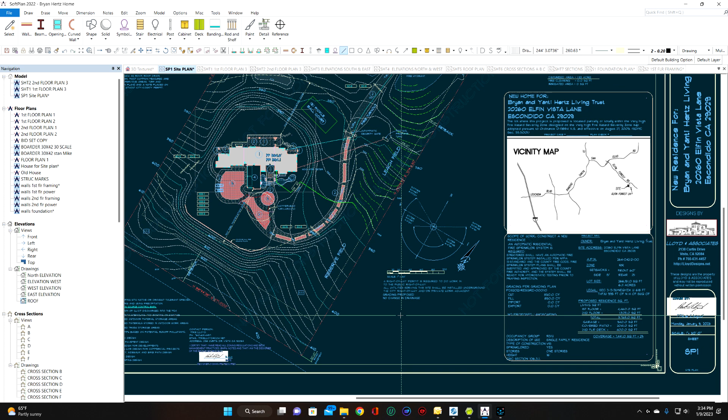My back's killing me, so forgive me if I'm short and crabby. Old, short, and crabby. I've got to stand to do these, so I can't sit at the moment. I'm just complaining, I know.

Forgive me, I sent you over the wrong site plan. That was an earlier version. I had some of these things already on this site plan, and I hadn't corrected where the number threes and twos and fours were supposed to go on all of it.

So I think I had threes listed up here. The three is the pickleball court, and here you can see this is even messed up. Three... oh, it's because I'm on the house site plan. It's going to take it a minute. Oh, good grief, this thing. Just do what I tell you, dang it.

And it's an existing pickleball court. I'll get to that question here in a minute. Let's see your first one, power plans.

That back area, okay, that's no big deal. The way I drew it, I figured that'd be a dining area. In a dining area, typically you need more lighting for any kind of workspace or that kind of thing, and you have the option of a fan light there also. So I'll just make those all the same.

Should we show the pickleball court as existing? Yes, I did show it as existing. I showed it with a 30 by 60 square feet, and that's up in here. I think that's on your set, 30 by 60. The number one is the house and the patio covers.

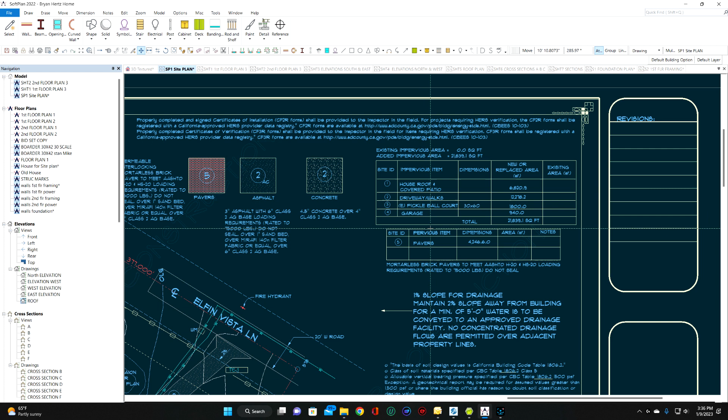2 is the driveways and walks, and 2 breaks down between asphalt and concrete. 5 is the pavers. So we've got house, driveways and walks, pickleball court, garage, and here's your pavers. So we've got that on there.

Included plans. Pickleball court's 30 by 60, I think that's what you told me. That's what that is. This thing is ticking me off, man, I'm crabby. That shows 28 by 60, we'll make it 30 here. Okay.

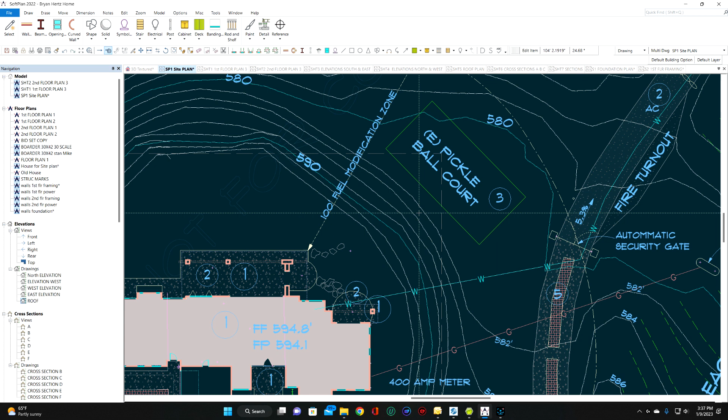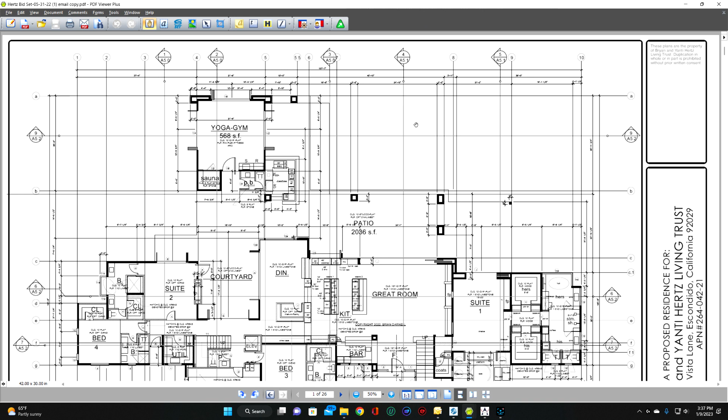Should we relocate the gas tank? I'm going by your permitted grading plan. Let's see if I can find that real quick. I think this is it. No, this is your bid set, and I didn't have a copy of a site plan in the bid set. I didn't have anything to go by other than what you sent me, and you sent me the grading plans, which I went by.

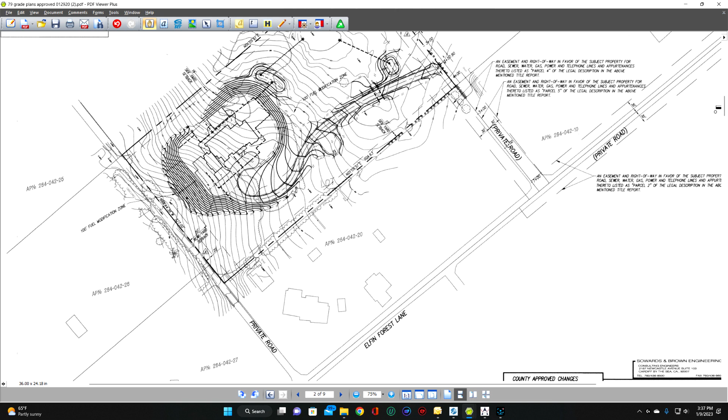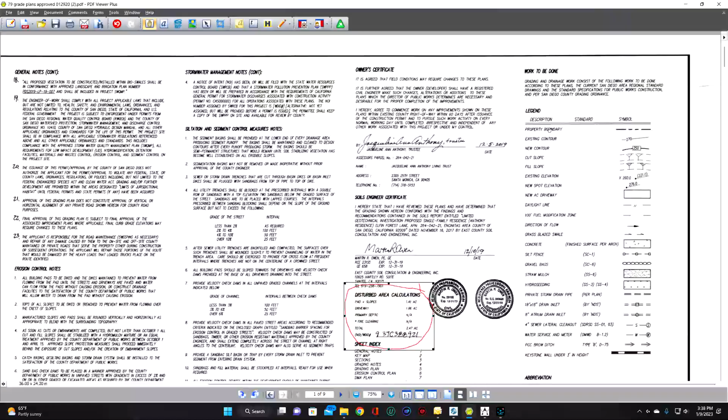The grading plans show that over here, and I'm just trying to stay as close as I can to the grading plans, because the more we change it, the more the chance that they're going to make us redo these grading plans. I've noticed these were done by Sowards and Brown, a great engineering company, been around forever, done at the end of 2019. They've changed some stuff since then, the county has, and we may be redoing this anyway. Hate to say it, but just to prepare you for it, just in case.

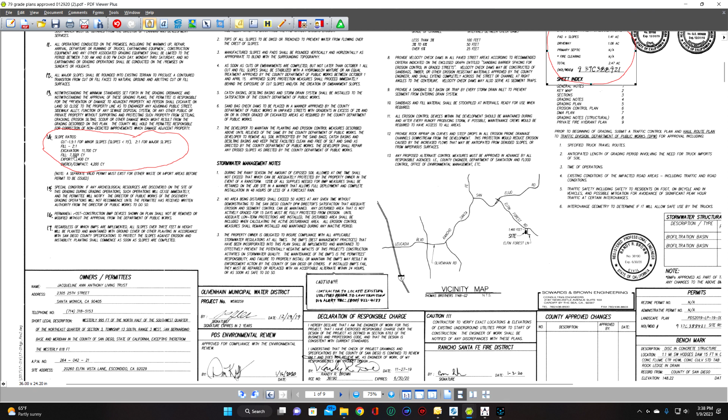Here's his excavation notes, that I have to put those on my site plan. I will, I haven't done that yet. Like I said, this is just a bid set, so it's not ready to submit.

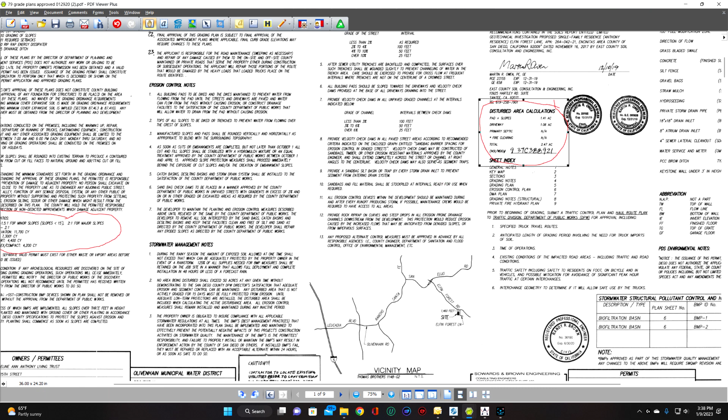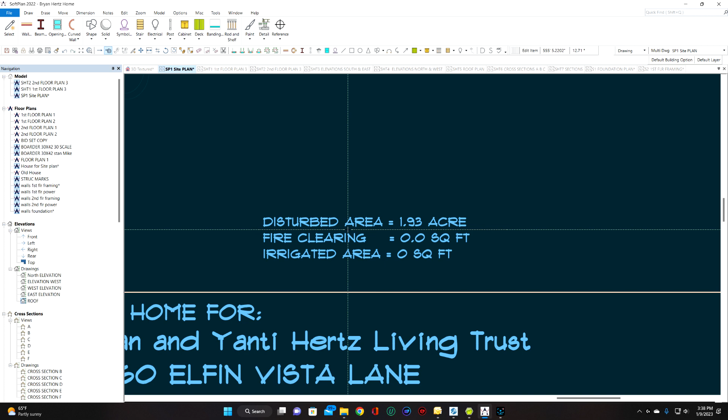Your disturbed areas, I come up with a lot less than they did. They've got 2.47 square feet -- I mean, where am I here -- I'm not feet, acres. I've got 1.93 acres.

So neither one of us is including the leach field, and it might not be a bad idea to just go ahead, if you've got a permit for this, go ahead and put this in and do it separately. Well, you can't really at 1.93. I was going to say, if you can get this under an acre of disturbed land, you're not going to have to do a major grading plan, but you're not going to be able to with all this going on. It's just no way, too much going on.

But if we include this, that's going to make it even more disturbed area, so I'm not including that. It might be a good idea to finish this out if we could. I'm not sure what DEH would say about that -- I think they need house plans. You could talk to them about that.

Because this isn't going to affect anything you do over here. You get an approved septic system, and it really improves the value of the property also.

Let's see, back to your stuff here. Should we relocate it? Oh gosh, what did I just do? We can relocate it if you want, or stick it over here, where I think you said it was. It's just one more change from the existing grading plans. Let me know what you want to do on that.

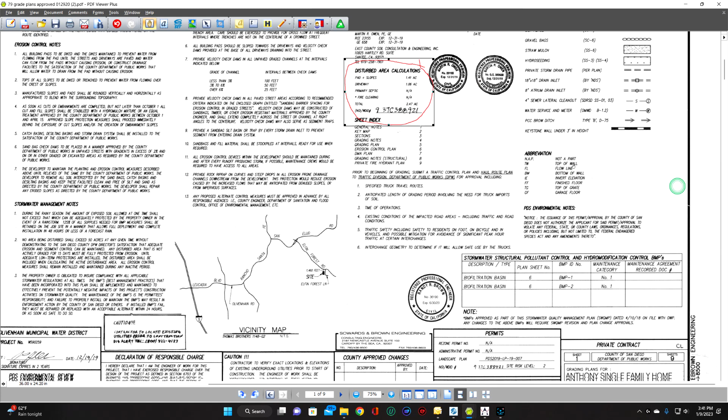We have 29,018 square feet of non-permeable approved in the grading plan. We do, I saw that in the... Now, if you've got something more current than this 2019 set of grading plans, I need to see those. But going by it, it mentions that number also.

I've got in this, 21,000, so there's 8,000 feet different here. Well, 7,000 somewhat different - 21,839.1, and if you're going to add a tennis court, which is 7,200, just a hair over what the grading plans are calling for.

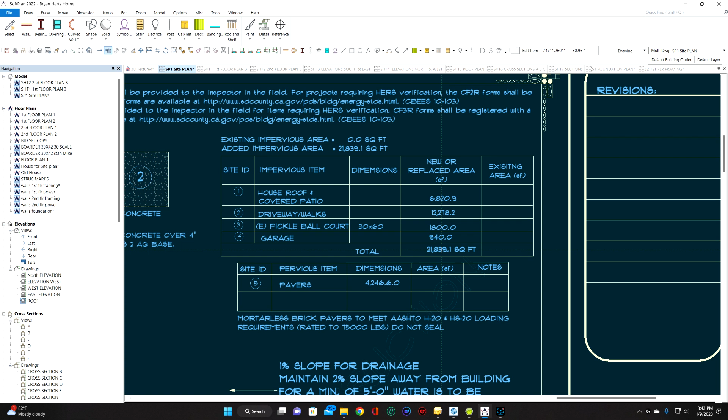Like 10, what is it, 10, 12, 13 feet or something like that. So I can fudge this to make that work if you want, reduce that number to where we don't go over the 29,000, whatever the number was. So we're close on that.

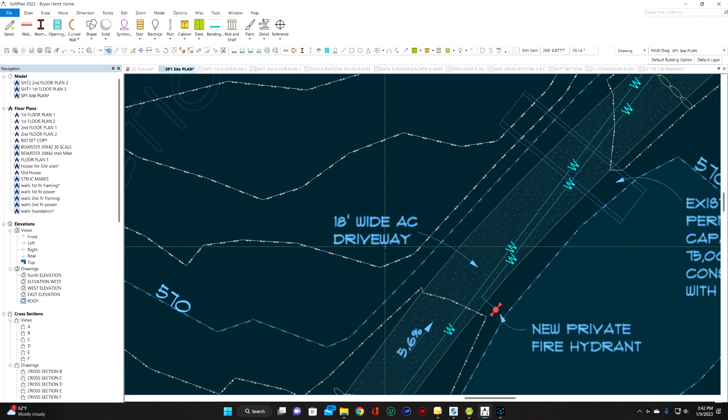The width of the driveway is 18 feet, that's what it is on that approved grading plan that I have. The easement down here is 20 feet, shows that 20-foot road. And I don't have to get real detailed on it.

This is mainly the building plans. I know the fire department does look at that, so they'll want to see that. But I don't have to show everything that the grading plans show - the drainage and all that. So that might be a good thing. But I think they're going to make us change it.

Usually a grading plan, when it's finished, is a legal document. And so they want these things as close as possible. We'll see what they say. But again, just preparing you.

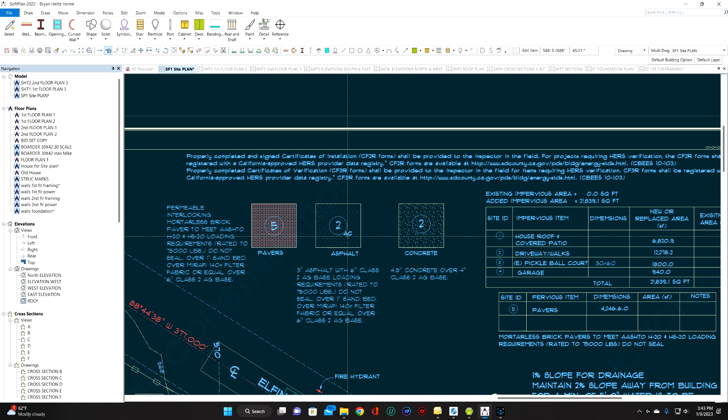Grading plan requires a machine. Yes, I've got this, this is this 2AC, is what this is up here. 2AC is asphalt - shows asphalt, 6-inch class 2 AG base, 6-inch.

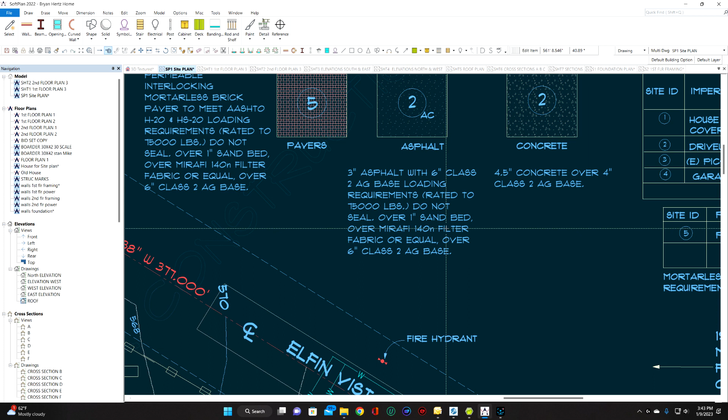Yeah, it could be 4 inches. Typically, if you want that 72,000 or 75,000 lb rating, unless you got really good dirt up there, which you might, you go with a 6-inch base. You could go with a 4 if it's good dirt underneath it. Then the engineers will make you do whatever's required for that.

So yeah, I'm taking this AC all the way up to this gate, and then I'm changing it from there to concrete. Going up this slope, concrete - I'm showing all concrete. You mentioned DG, my plans, none of the plans that I had mentioned DG, so that's what I went with, but I can change that. With the driveway, grading plan, machine curb, I believe.

Which needs to be, yeah, we showed that. Grading plan requires machine curb. Asphalt, most economical, I agree. Asphalt's the best way to put that curb in there. I don't have to show the curb.

That keystone wall is where you were making this transition to a hard surface. If this is the fire turnaround, it's got to be something like AC or concrete. I mean, they might let you do DG, depending on the fire department. But the Carlsbad Fire Department, that fire department up in that area is pretty picky, from what I've heard.

So I think you're going to have to go some type of concrete paver in this area. You can go DG over here, that's not an issue. I don't like DG on a nice house because it's a maintenance thing. It rains and stuff, and even though it's compacted and all that, after a while it erodes and turns into a mess. But it's your house.

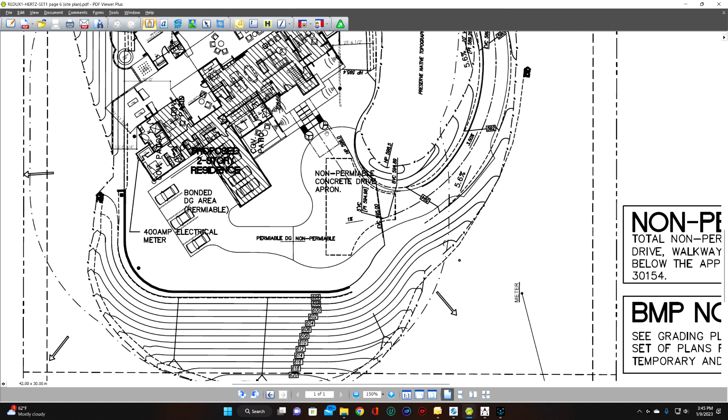Like I said, I'm crabby with the modern exterior. I don't know if I like the pavers. Now, the pavers, what he's doing here, maybe I'll answer a couple questions with this. Even your previous architect, let's see if I've got that handy. Here we go, your previous architect, he's got these radiuses in here, and then he's got these radiuses with the pool. It's not shown in this one. This is the thing you just sent over to me, and it's the first time I've seen this one.

I think I might have had a reduced one of these, I didn't have all those side notes that I'm aware of. He's breaking up all the hard lines with these curves and introducing other materials. The pool back here, you've got all these real nice curves in here, and he's creating contrast with that.

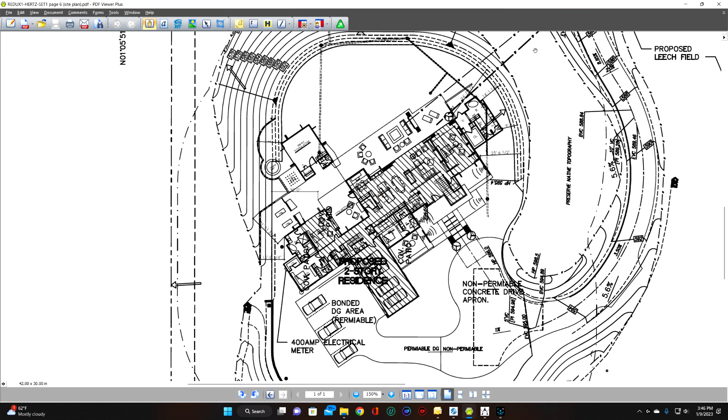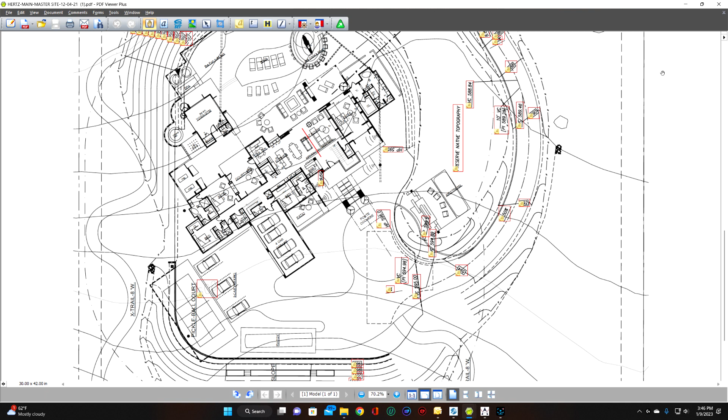Here's one, this is better. You see the curves, the circles that he's putting here. He's got all these squares, all these hard edges, but then he mixes in these nice radiuses, the pool, this whole thing right here, that's all these radiuses and curves. He goes back to a little bit of hard edges in here, but then he's got the round again. And it's the same principle that he's doing here.

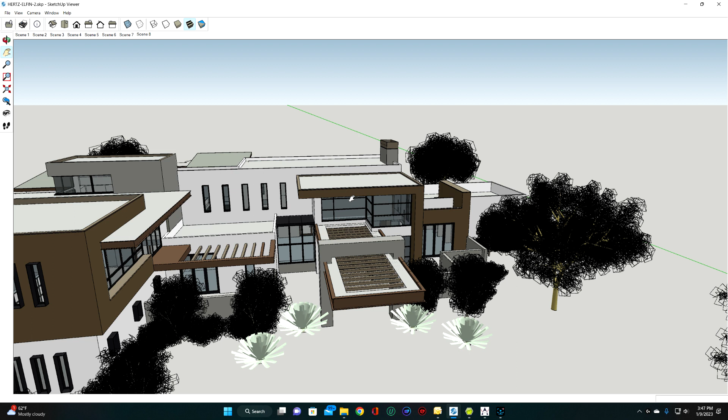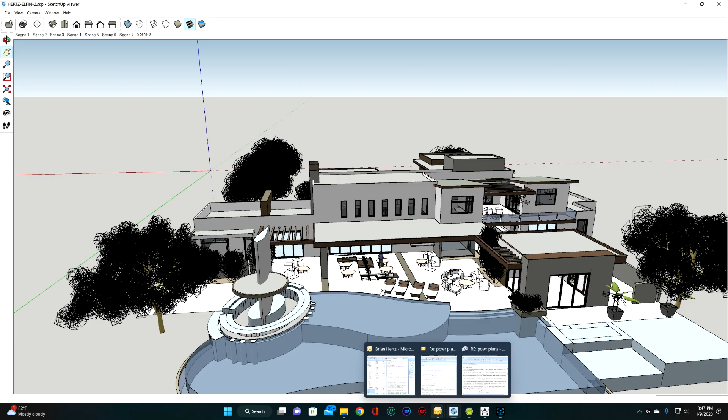Let's pull this up again, I think I got it handy here. Yeah, it's the same principle as the vertical and the horizontal elements. It's the exact same thing, it's creating contrast. This thing finally catches up here. Computer's struggling. Okay, well anyway, that's what all this stuff is about in here, these curves and all that, and then the driveway is the curves. You got all this hard edge stuff, very industrial looking, and he's softening it by doing this stuff, and he's creating a contrast that really, I think, really makes it look great.

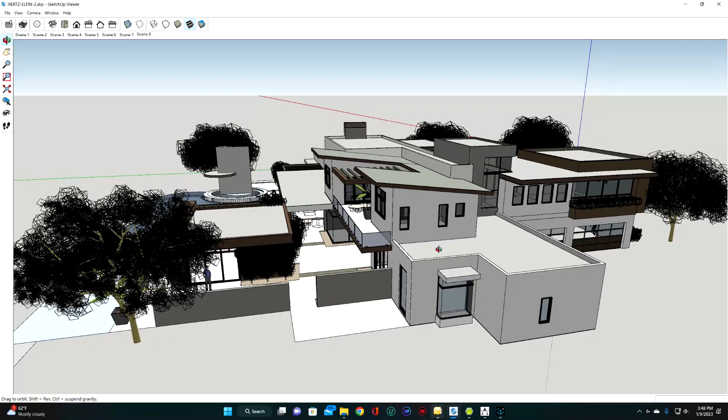Now I think he's cheating in a few things. He's trying to create privacy by throwing walls in here. I don't know if you were going to do that or not, but it's kind of cheating. The way I did it was in the design itself, I created the privacy. I'm not disparaging his work, I think he's done beautiful work here, but I think the walls are cheating. Anyway, let's get back to the questions or I'll be talking forever here.

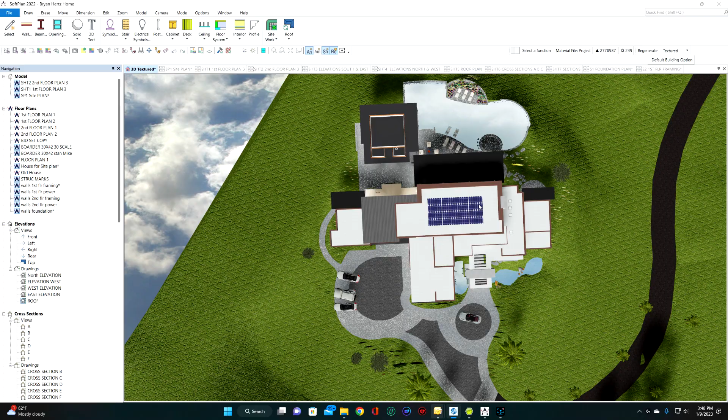Let's see, modern architecture, I don't think the pavers, I just disagree with you on that. I think the pavers, just like the round edges, the radiuses and all that stuff, I think it adds contrast and softens the hard edges and really adds interest. Like I said, I've had a bunch of reviews by architects and draftsmen on that Facebook site, and I think I got 80 something comments that this is just beautiful. I think that I would go this way all the way, but it's up to you.

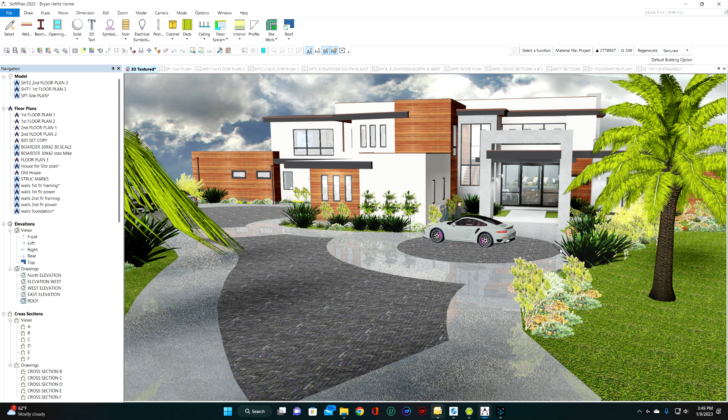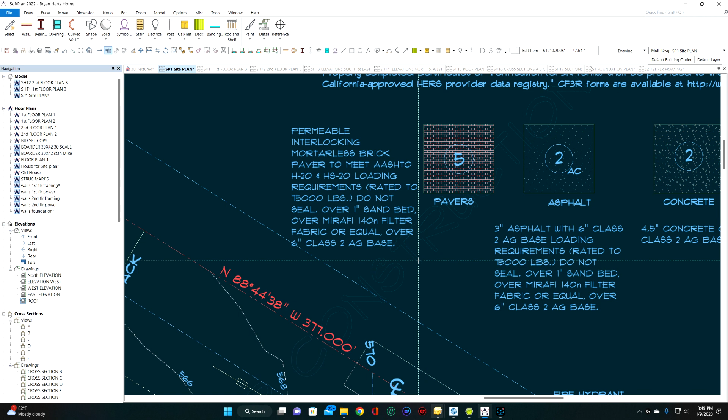And then on that grading plan here, let's just go over to the site plan. On the site plan, I list out what the requirements are for the permeable interlocking mortarless brick, the pavers. I have to meet these two things is all, and most of the supply houses know what that is, so they'll give you brochures or ideas on what you can use that meet those requirements. And they're not cheap, no, they're expensive. Pouring concrete's cheaper, but that's going to look fantastic.

I didn't, in my 3D, I didn't add all this stuff down there. But anyway, I think that that's the way to go, but that's my opinion, I'm not paying for it. Where are we?

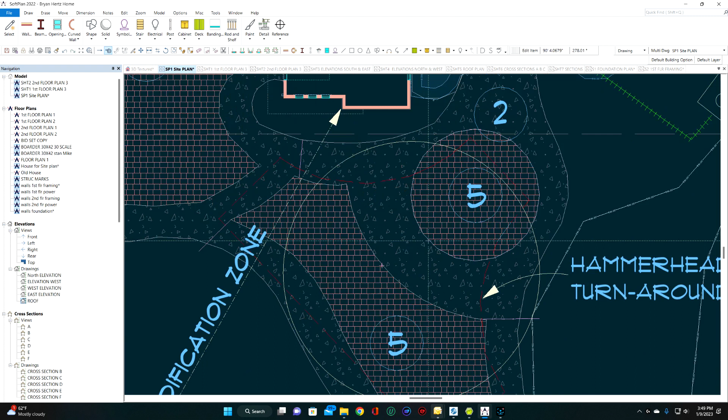Hammerhead, I do have a hammerhead in here. Here's the hammerhead, it's shown on the one I sent over even. It's on there, it's probably too light, but there's a hammerhead there. It's not the same direction as the hammerhead he had because we changed stuff, but there's the hammerhead. And this circle is 24 feet, so if I change this a little bit, we could just get a 24-foot turnaround in there. I think they'd rather have the hammerhead, but it's there.

How big's the circle? Yeah, that's 24 feet, very close to it. I can just change that if you want to do that.

There's some real value in placing the propane tank at the top level, trenching across the drain. We talked about the propane tank already. If you want to move it, I will.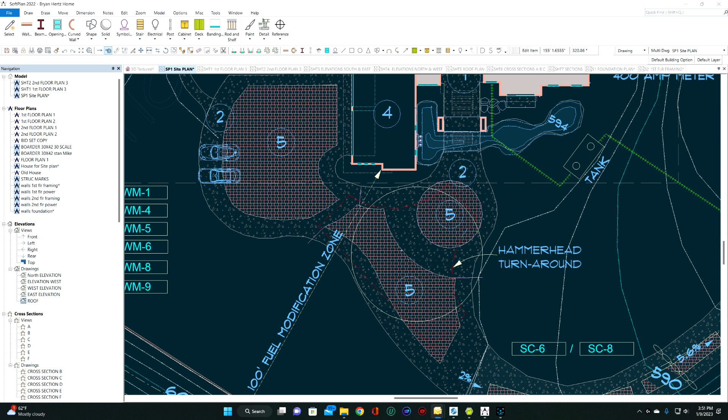Just notice the decks, fireplace, the master bedroom, outside bath. I think that everything should be squared off except for what's associated with the pool. Like I said, I disagree with you. I'm sorry, you want it square, I'll make it square, just as long as the footages match, that's fine. I think the round creates the contrast that you're looking for in this.

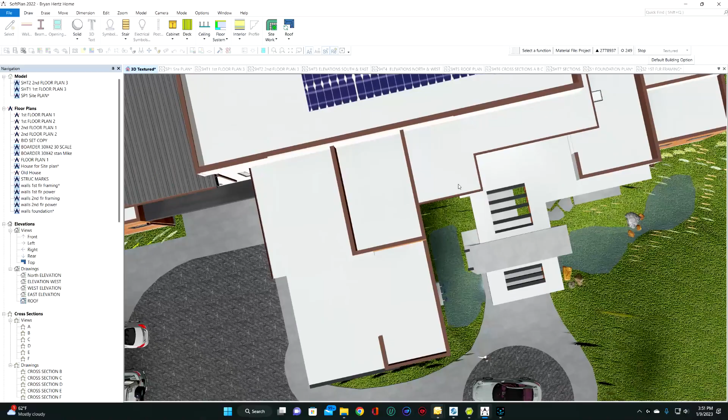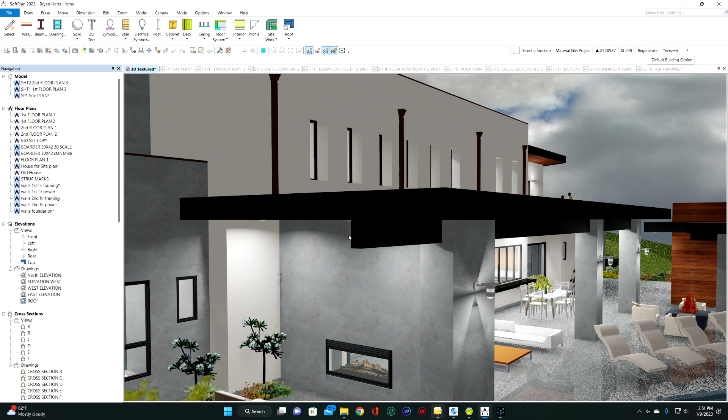Softens all that. And someplace I think you mentioned you didn't like these. That's fine, this can be - and actually the way I did it in the structural plans, this is a plastered beam because in one area we have to sandwich these beams to make them work. So we cover that all up with plaster, and then you can use manufactured beams that aren't listed for the exterior if you cover them, and they're a lot less expensive.

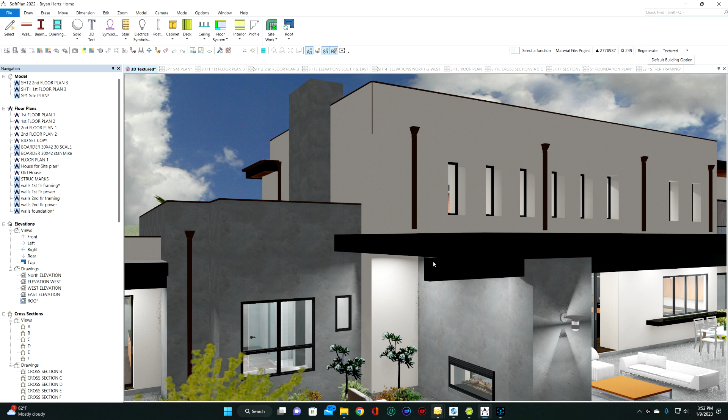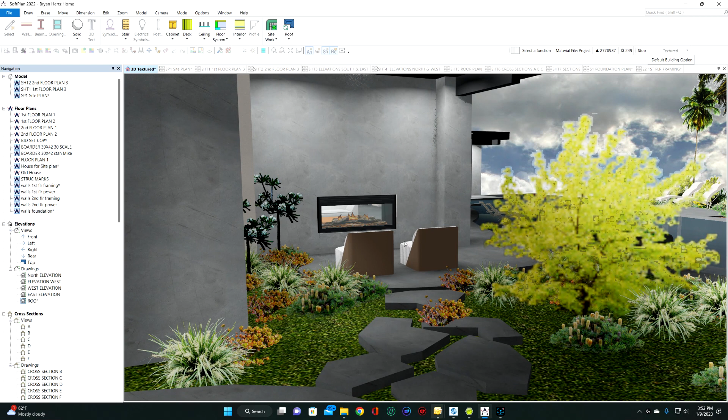So I think there was some mention about you didn't like this area or this area covered, and once again I've got to fight for the design here. It creates shade, it creates privacy. The master coming out here on a nice crisp autumn night with a glass of wine, the missus kicks on the fireplace for some warmth, and you've got this view of the pool, you've got this little private area.

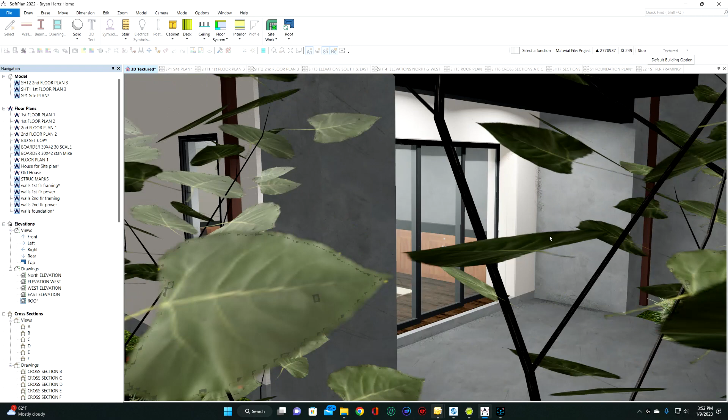I'd kill for this. I just think this is Shangri-La here. So now as far as the covering over this guest room, yeah okay, we can take it or leave it, but I think that it really adds to the design. Here, let's get rid of it real quick.

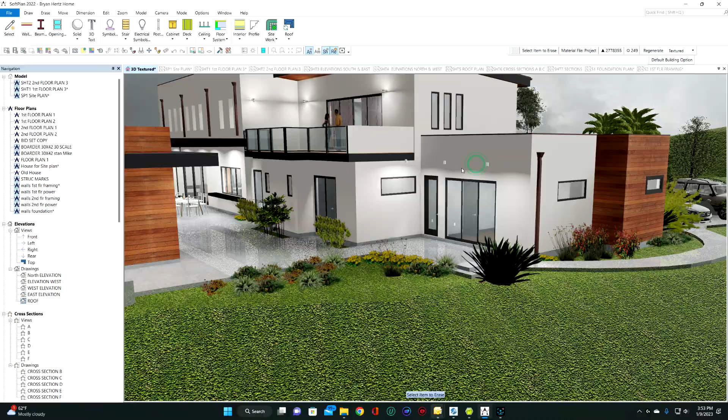I'll leave those lights hanging there, you can do that if you want. The way I created the privacy for the guest room too is by setting it back here. It creates its own private area, and when you put that all back in there...

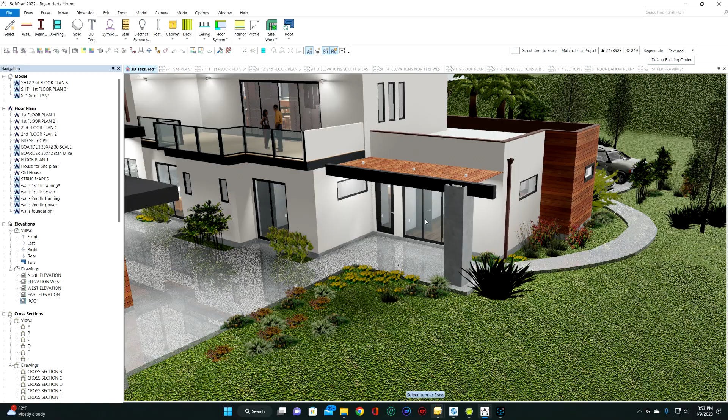Take me a minute, there we go. I think that's pretty sweet, especially when you do all this stuff. It gives this a little private area that just takes in this direction, covers that. The thing with the guest room here too is, they don't have to go through the main house to get to it, they can just access it through here.

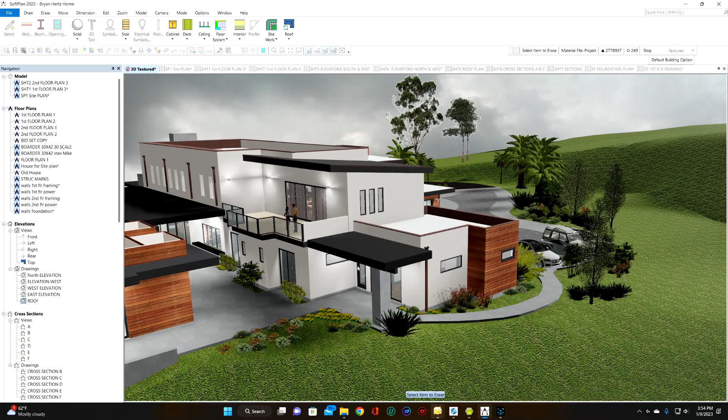If I was a guest, I'd never leave. That's up to you, you want to get rid of that. You're not spending that much money to do that right there, I don't think, not in the grand scope of things. And for some reason my engineer didn't have enough shear going through here, so he's trying to use this column as part of the shear of this line in the structural plans. So if we get rid of that, he'll have to do something else.

I think he just adds another steel column in here. They're not columns, they're the hardy frames - not anything like the steel stuff that your previous guy was using. He went nuts.

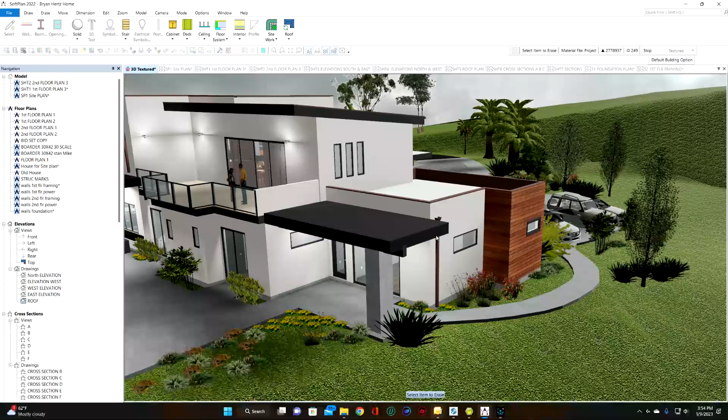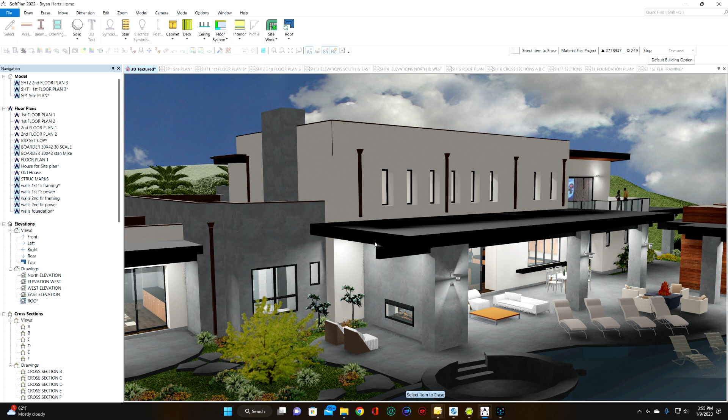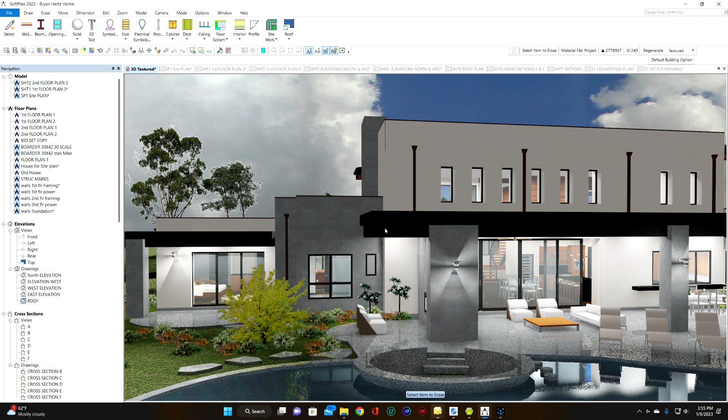To be honest, I don't like the pictures you sent me, I think that's ugly as sin. I think it needs the overhangs on it, but the beams could be flush or even set back a little bit. This would be a big stuccoed beam underneath there, similar to what you've got, but we're not chopping the covering off right at the wall line or right at this line. I think it requires some cantilever there for it to look right.

And we could do the same thing here - instead of a beam poking out there, I'll make it flush and encase it in stucco. I think it'll look good.

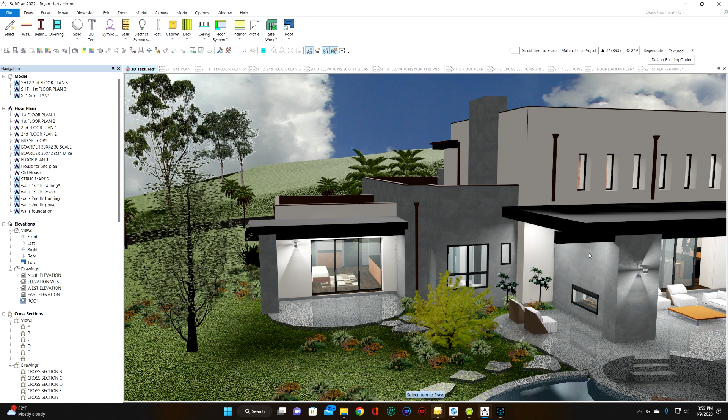Okay, what else Bryan? Oh geez, going on forever here. The deck dimensions - the overall from here to here, from there to there, this is 20 foot by 57, I believe. Here, let's just go floor plan real quick. And 52 to this point here, and 52 to there.

But then when you calculate in the overhangs, it's about 57, a little more because there's an overhang over in here. It's about 60, somewhere close to 60. Here, let's just do this. Come on, Mike. It is 57.7 by 20 feet - that's the outside.

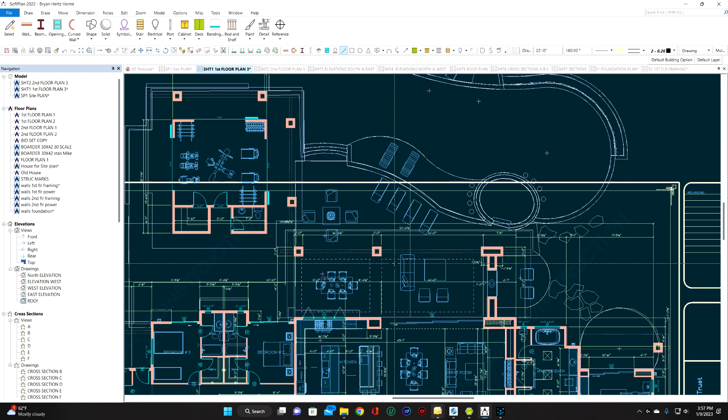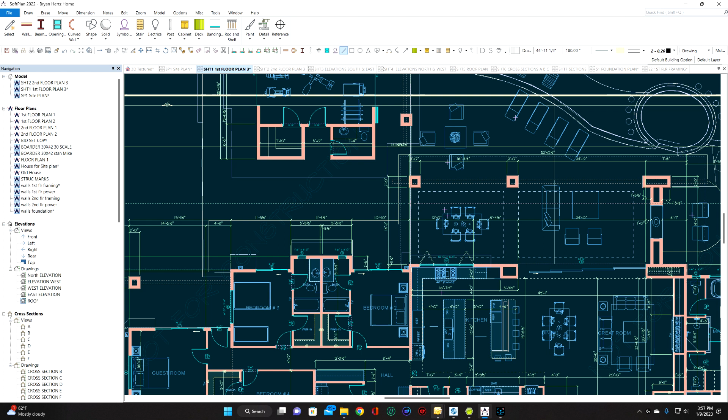Now if you want these dimensions inside here, we'll go to center - well, here we'll go just this opening area here. This should tell you on your plans too: 24 here, 16 there. In between these, from here to here, it's 14 foot there - 14.2. And if you wanted to just do the overall from column to column here, 45 feet. It's a big area. Okay.

Okay, then we did that one. Did you get my note about losing the patio covers over the left side? Like I said, I disagree. But if you want to lose it, I'll lose it.

On the site plan, it looks like a hardscape from the front, smaller bedrooms. Yeah, I've got hardscape out in here. You got to have some kind of hardscape in front of the doors. Let's go back to the site plan. You can't have a doorway without some type of hardscaped surface in front of it.

So it's a minimum of 3x3. Concrete's typical, but it could be something else as long as it's permanent. And you're going to want something in front of the garage door. You don't want just DG leading up and rolling into the garage door. You'd bring sand every time you park in there.

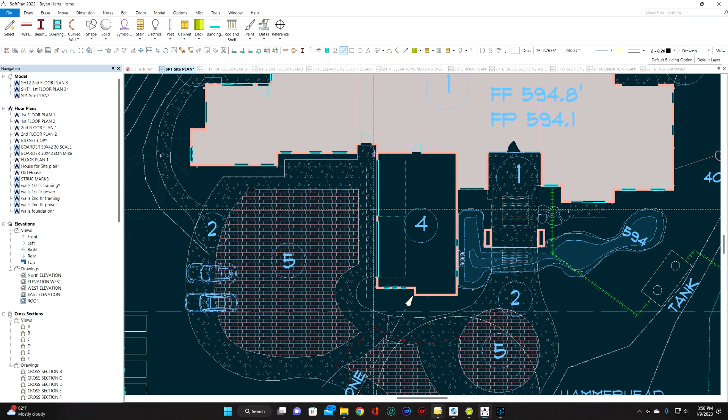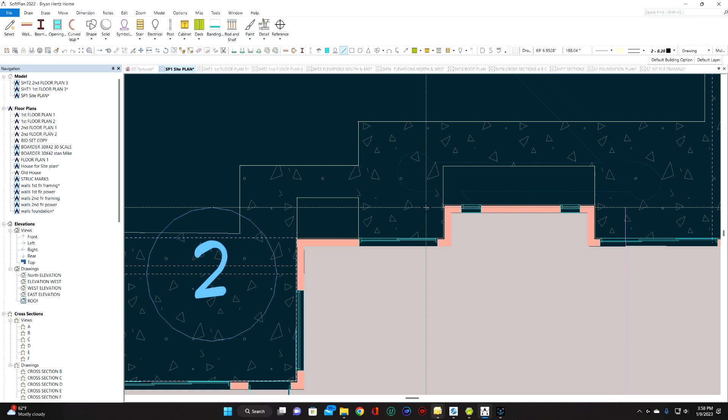I'd recommend, I think it's a 3 foot minimum, but I'd recommend like 6 foot or so if you're going to go DG out here. In front of each door, you have to have some type of concrete stoop, some type of permanent stoop, 3x3 minimum at the door area. Now these are sliders, so that whole opening has to have at least a 3 foot deep by the opening of some type of hardscaped surface going out of those, and there has to be a certain height compared to the door threshold and all that.

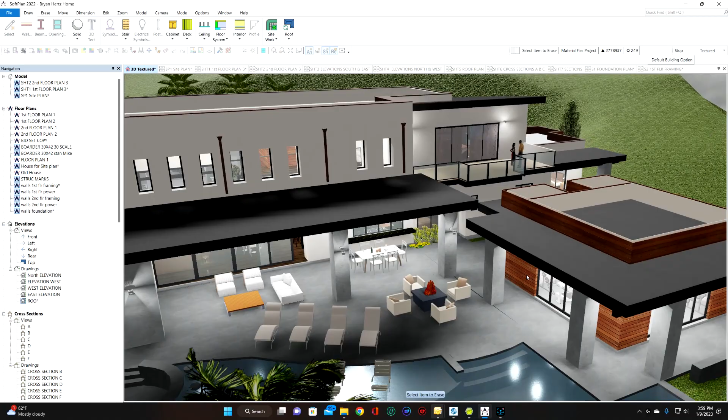So let's go to, I think you wanted to see a 3D of that. So what this would look like - I'm showing it all the way across here. This would all be hardscaped eventually, but in the plan, I'm cutting it and bringing it out straight across here with a little planter here. So it's coming out over, coming over to here. This creates a walk into the guest room and into these bedrooms.

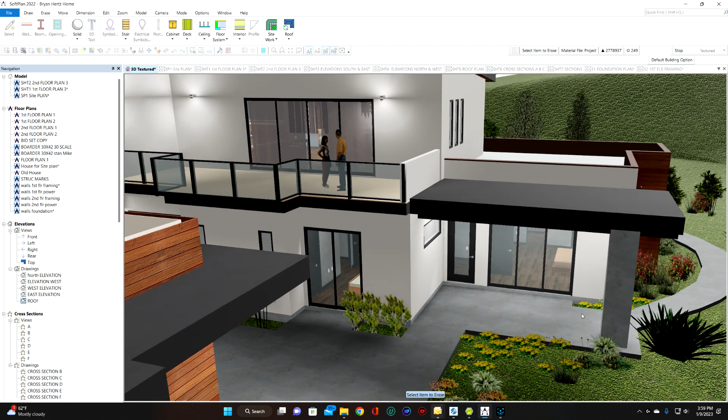Let's go back to your questions. Number 16, on the walk around, I like to see DG rather than concrete. You can do DG there. Yep, that's...

The DG is not cheap. You've got... concrete's more expensive usually, but you've got to put it in and roll it. You have to form it somehow. And what happens after a while? It just kind of fades off into the landscape.

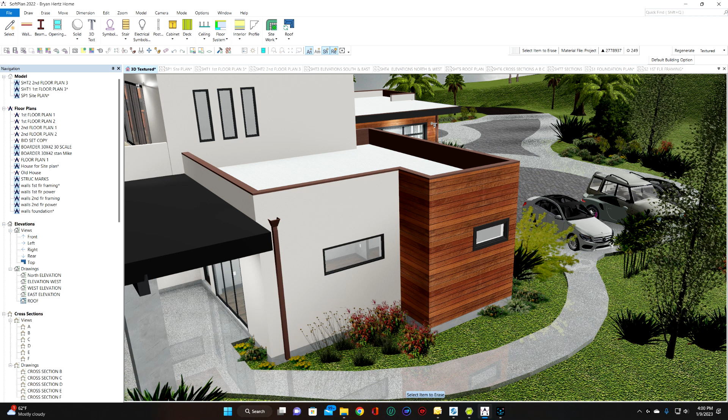I think you ignored the drainage plan. Yeah, we're going to ignore the drainage plan. Like I said, I think they're going to make us change the grading plans. But if that, I think what we do is submit these and just refer to that grading plan and see what they say.

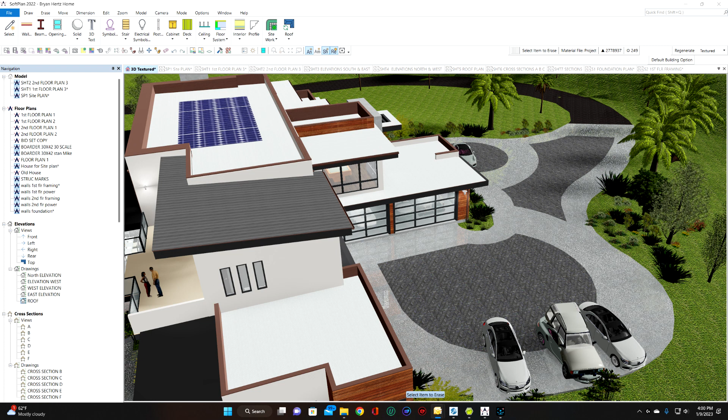Electrical plans going to storage room. That storage room, yes, I like that idea too. I did that actually when I was doing the... the what, Mike? When I was doing the power plans. No, yeah, it's too big.

Yeah, get rid of that. But I like the idea of a door in here and being able to use that. I don't know, you can make it a secret door, if it's swung this way and out - well, you couldn't do it that way. No, you couldn't. That would be tough to make it a secret door. But anyway, I tried to use the space behind there, and also you're accessing the back of the machine if you needed to. I'll put a door in there though.

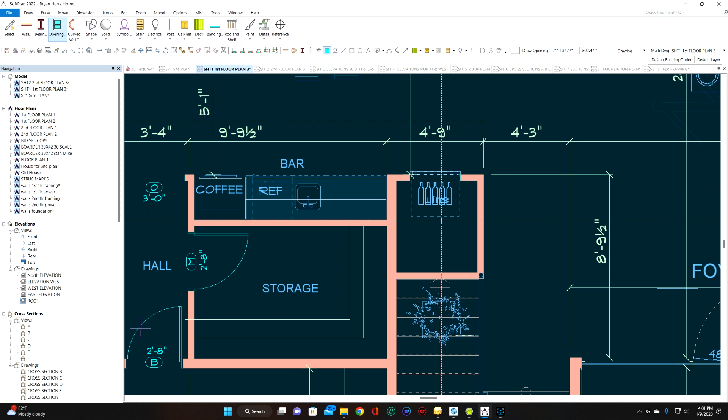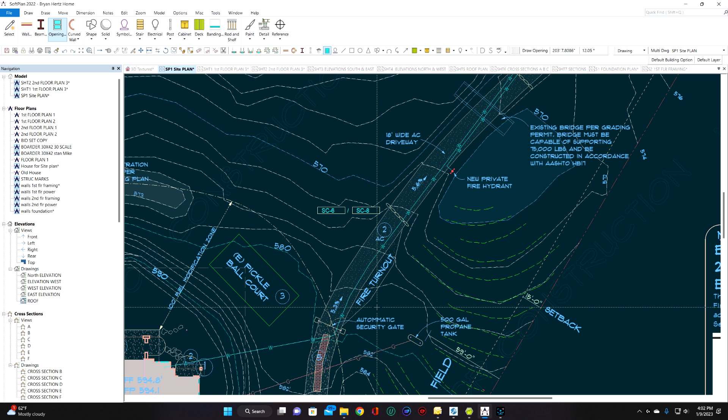I think though that you have to add some kind of a turnaround here in case they come up and they're not coming in. I know you've got a DG area over here. My sound just went out, my microphone. I think you have to do a turnout over here, and a turnout down here too if you want to do that. Not sure, but that's a fire department thing.